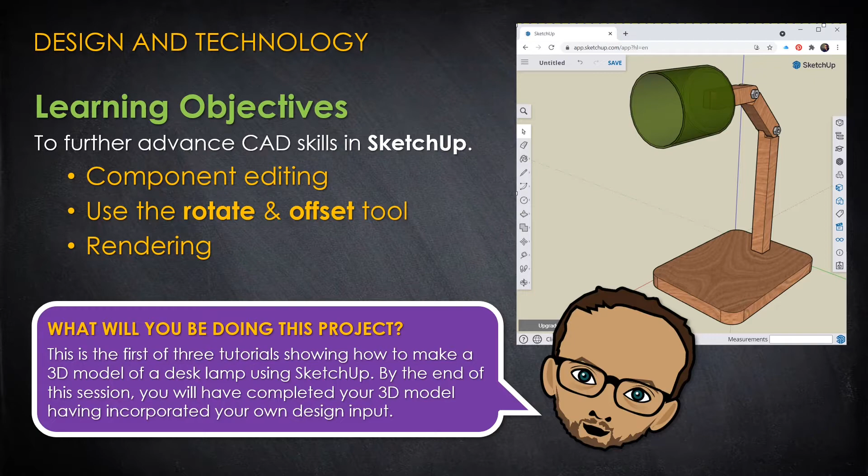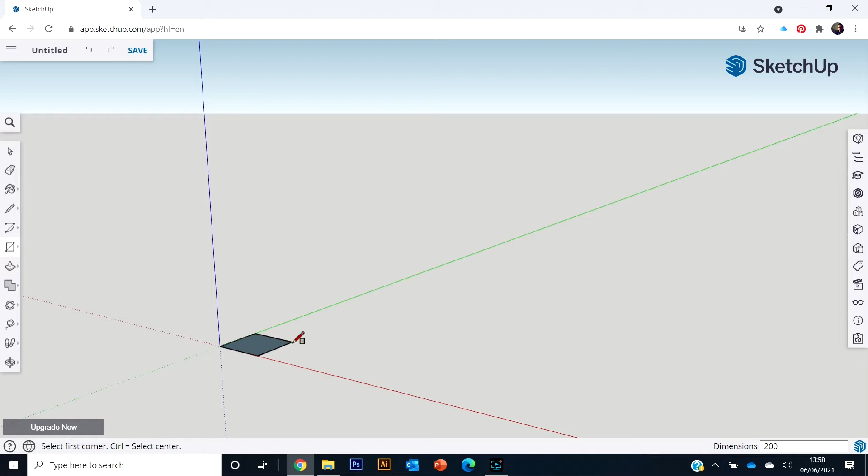Okay, so we're going to start by making the base. We need to get rid of you. I'm going to use the rectangle tool, draw a rectangle. I think the dimensions are 200, 150 and enter, and it's snapped to the right size.

Zoom in and now add some thickness. Use the push-pull tool, click and drag that up, and I think it's about 18mm thick. So 18 and enter. And for now, that's our base, and we're going to leave it like that.

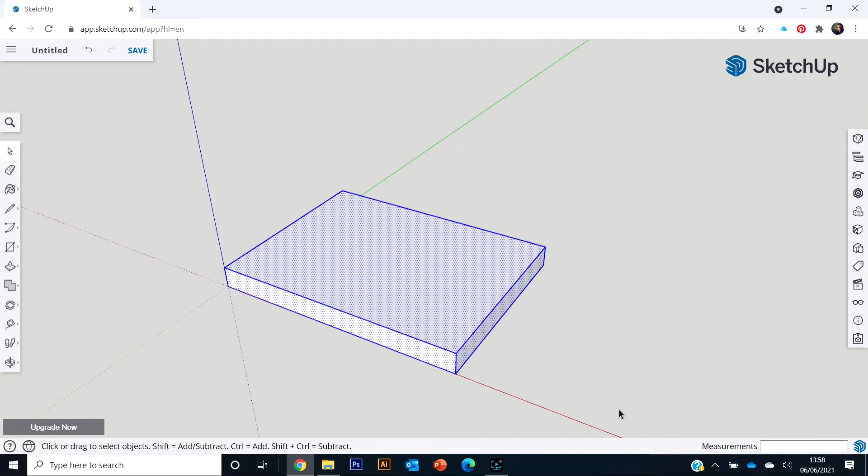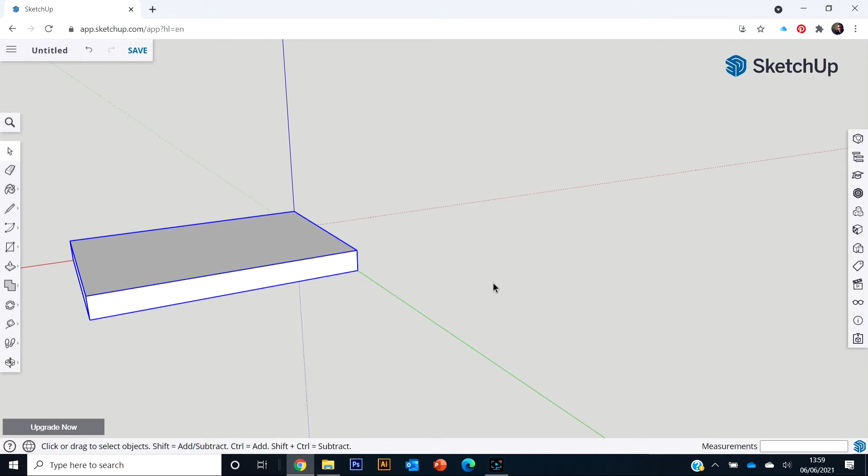So select the whole thing, right click, make component, and I'll call it base. Okay, and we'll come back to that later to make the mortise. For now, what I'm going to do is move that to the side slightly. There we go. So I'm moving it by holding down the scroll wheel in the center of the mouse. I can orbit, and then I can press shift as well to pan and just move it to the side.

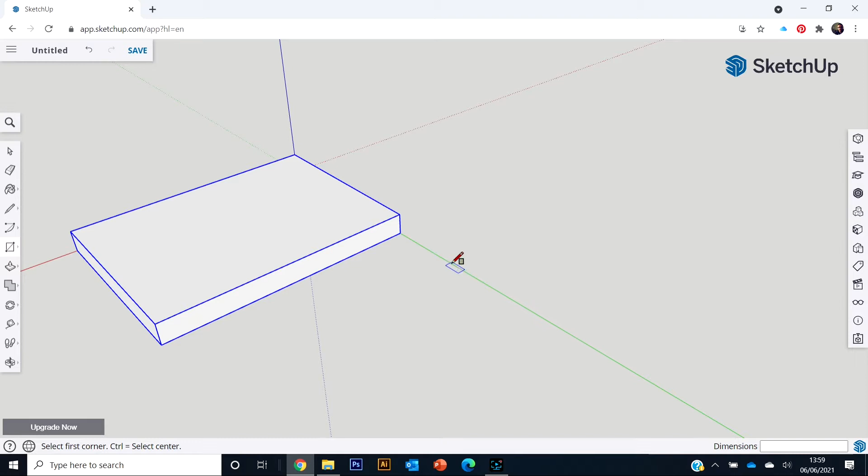So again, rectangle tool, and this is going to be the stem, which is 20 by 20mm, so 20, and enter. That's the width and thickness, and then the length of this is 200. So I'm just going to click, drag that up, type 200, and press enter. There we go. Okay.

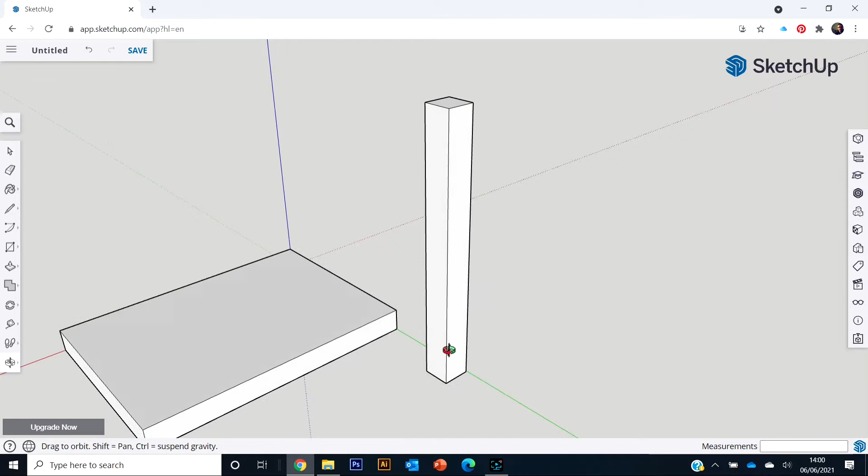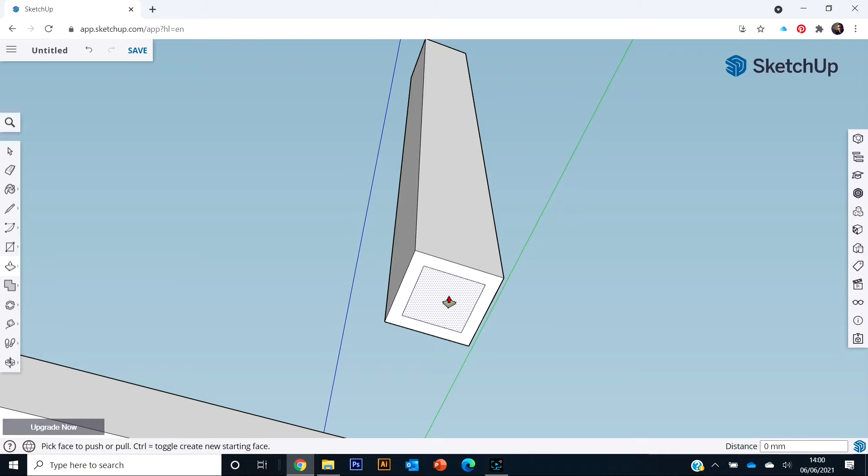First thing I'm going to do is add the tenon. The easiest way to do that is to use the offset tool. So I'm going to go where the push-pull is, use this option, the third one, offset, go to the edge, click, drag in, and I'm just going to drag in by 3mm and enter. Go back to the offset and turn it back to the push-pull, and just drag that down 10. Okay, so that bit's done.

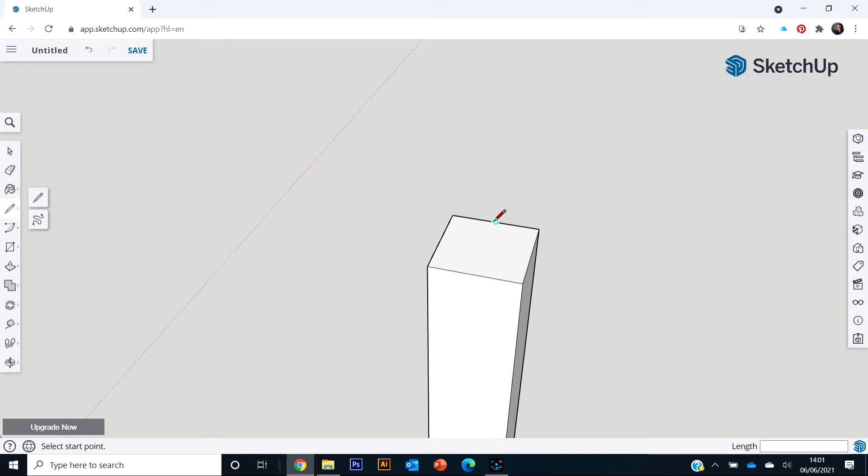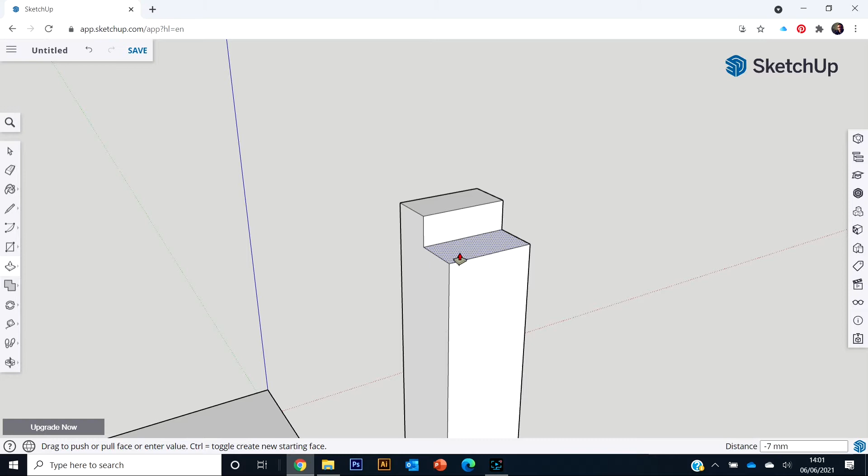Move back to the top, and what I'm going to do is split this in half and take half of it down with the push-pull tool. So pencil tool or the line tool. So I've locked onto that midpoint, dragged it across. Now I can use the push-pull tool and select it, drag it down, and I'm going to make this bit square, so I need to take that down by 20. So 20 and enter. Okay, good.

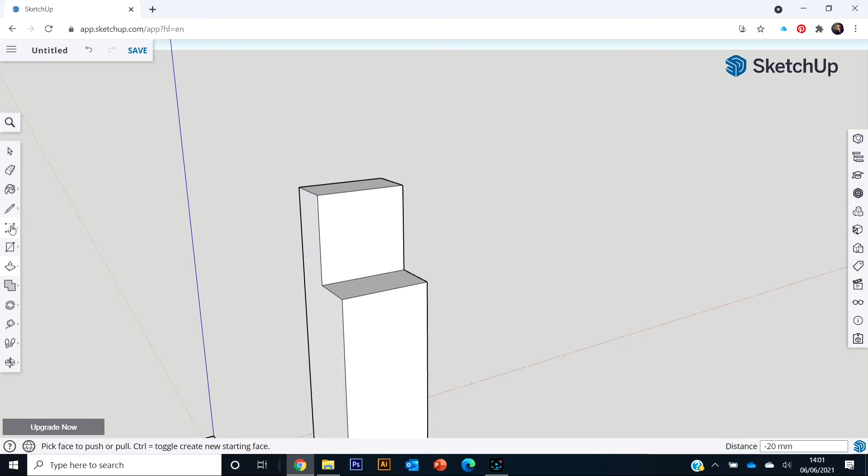Now I want to put a hole in the center, and I also want to round these edges here. So the easiest way to find the center is to draw a line down the middle, get the circle tool and find the center of that, drag it out, and we're using M6 bolts, so they are 6mm in diameter, so I'm just going to make the hole 6mm in diameter. So the radius is 3. Enter.

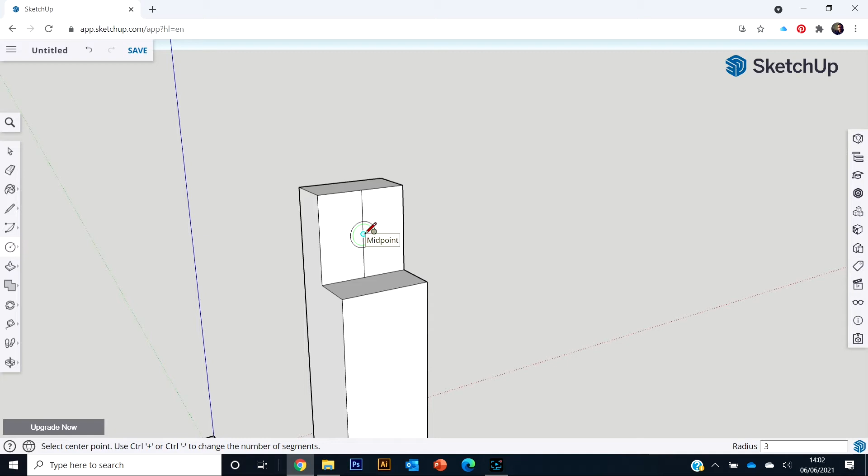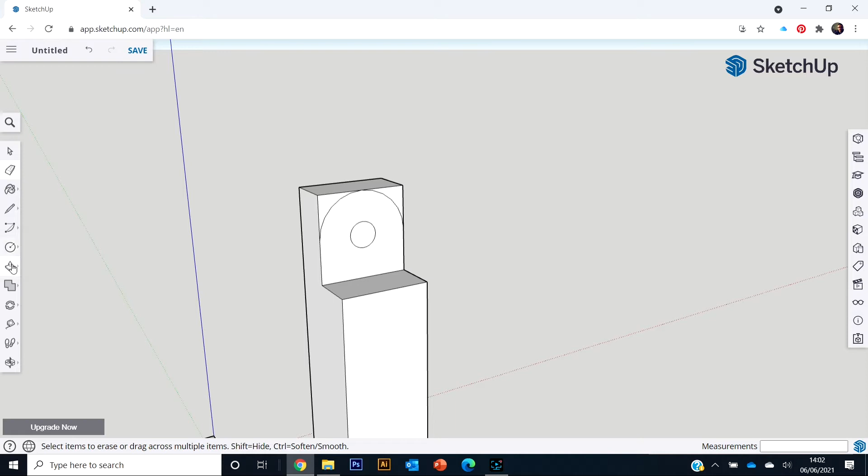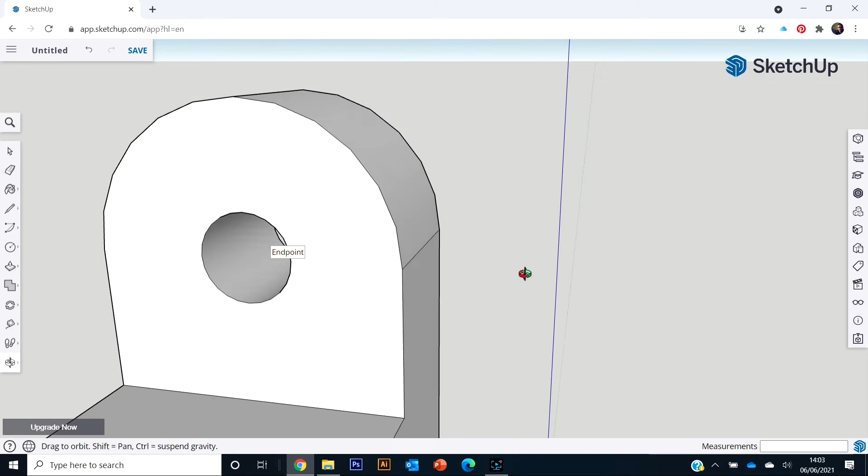Now I won't get rid of the line because I'll use that point to drag that up, and that gives me the curve on the edge. Now I can get rid of that line, and I also want to get rid of that bit and that bit. Push pull tool, make sure that's highlighted, click and drag to the edge, drag to the edge, and do the same here, and I can use the edge there as well. And just a quick check that that's gone all the way through, which it has, and that is done.

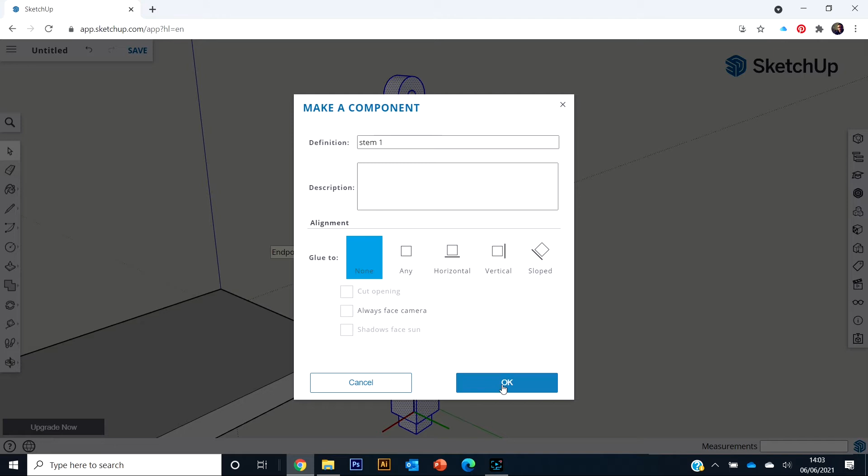So I'm going to make that component now. So selection tool, drag across the whole thing without getting anything else in, right click and make component, stem 1 I'll call it. Okay, so we need another one of those, but the next piece is going to have this on both ends, and it's going to be shorter as well. Is it easier just to copy this one or make a new one from scratch? It's probably easier just to copy this one.

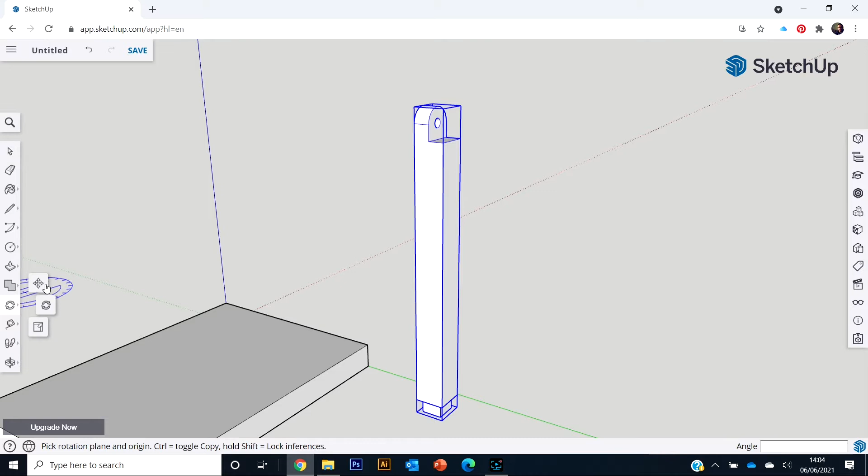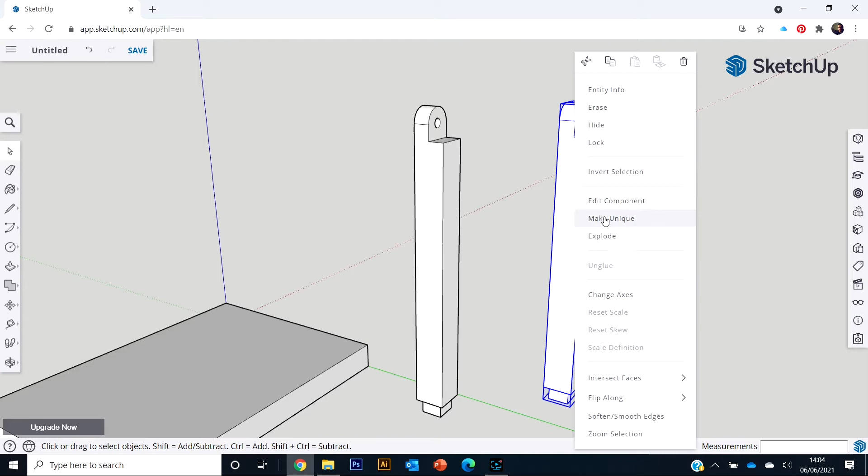Move tool, click, drag it across, and then just tap Control and it'll make a copy. So I've tapped Control and it's made a copy. Alright. Now, because this is a component, whatever I do to this one, it'll do to this one as well. So I need to make it unique. So I'm going to right click, and just under Edit Components it says Make Unique. So it won't do that anymore, they're two separate components now.

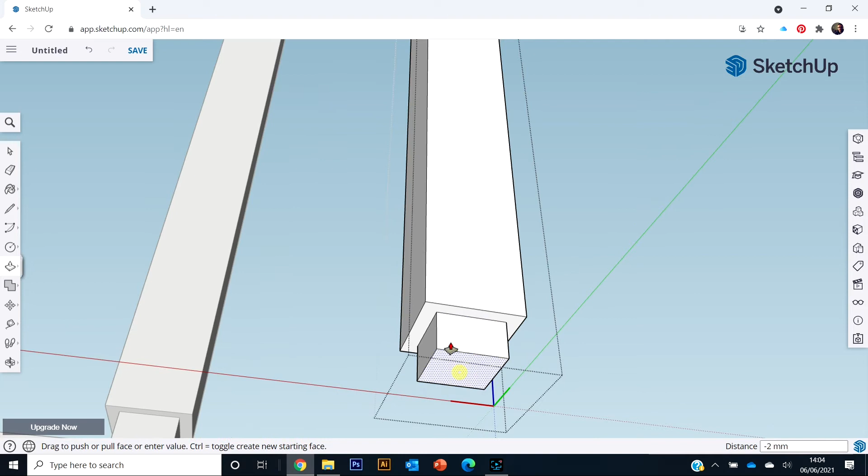And essentially what I'm going to do is edit the component by double clicking. I'm going to get rid of this. I'm going to delete those lines. And I'm just going to drag that up by 100.

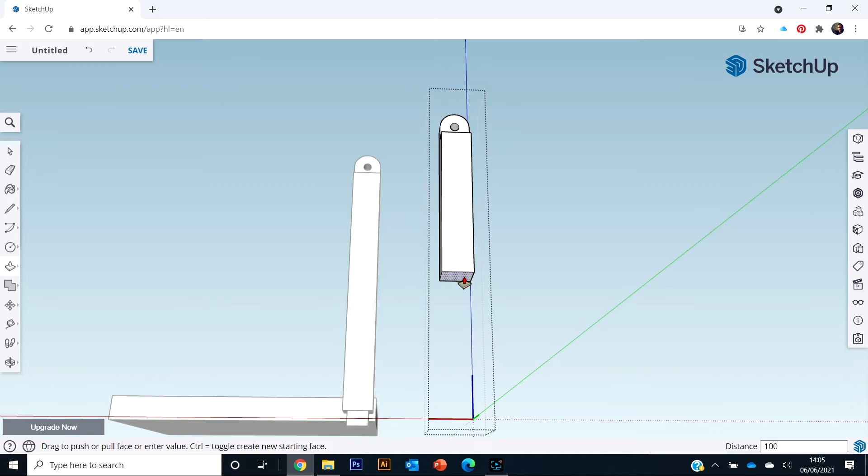And enter. Okay, let's just check the length of that. I can use this pen, the line tool here. So I click on there, that should be 100. And it is, I can see, bottom right-hand corner, I can see it says 100 there.

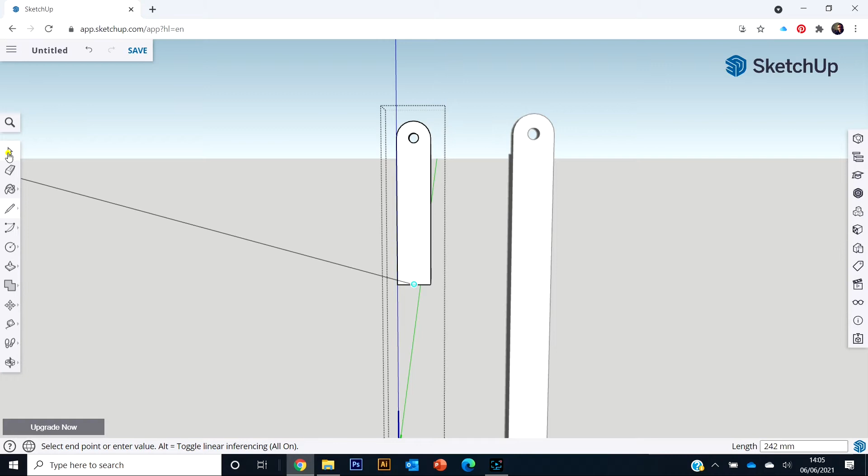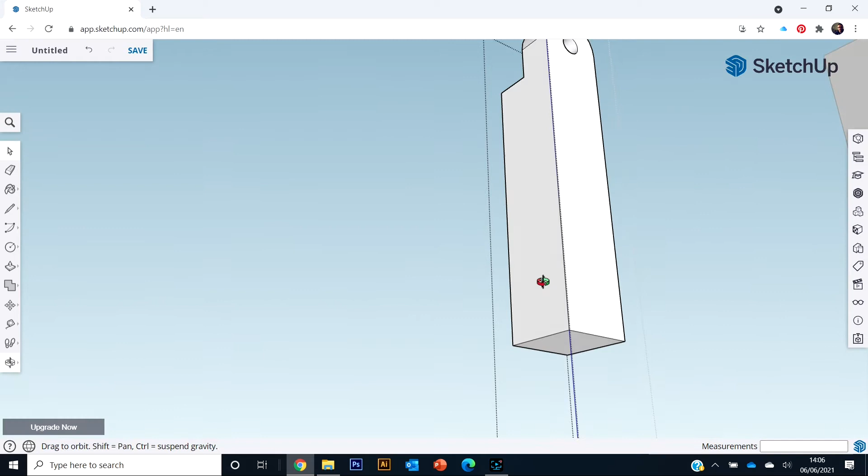And now I need to do this on this end, but on the opposite sort of side. So I'm going to zoom in a bit. Where's the best view? Okay. Line tool. Midpoint. And I'm going to take this bit. Can you remember what that was? It was 20, wasn't it? Okay. Can you remember what we did last time?

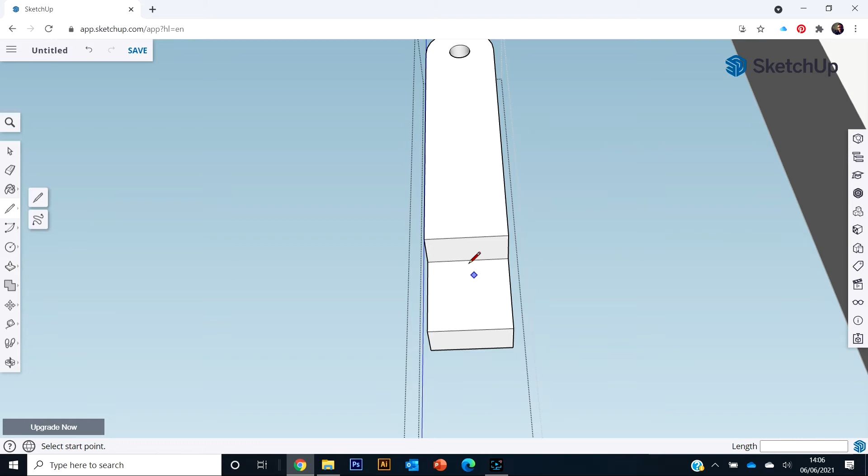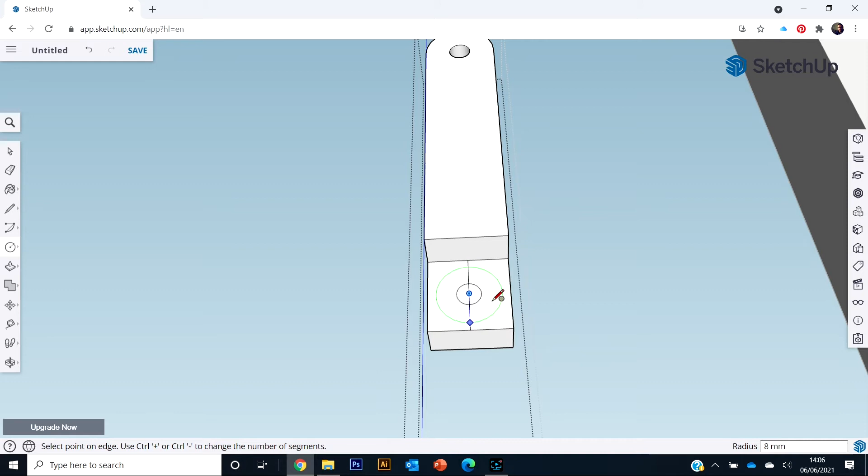Line tool on the center, circle tool, again lock onto that midpoint, drag 3mm because we want a 6mm diameter, and then just drag. Doesn't matter where I drag that to, because they're all the same distance from the center. Delete the line, delete these bits,

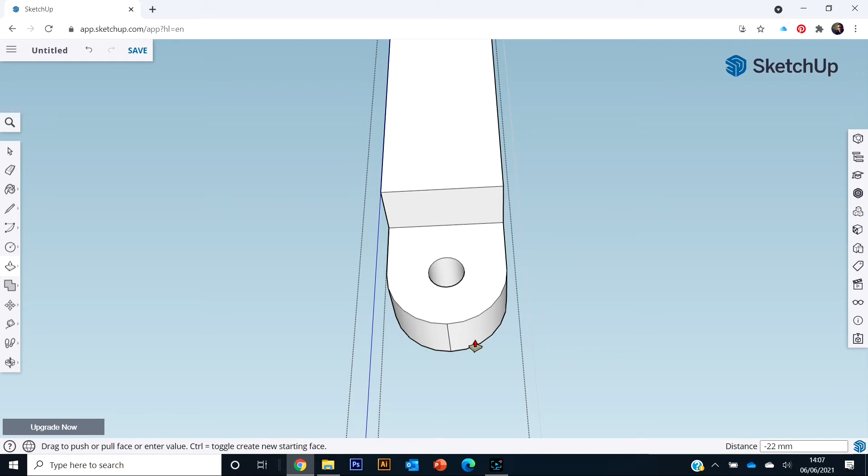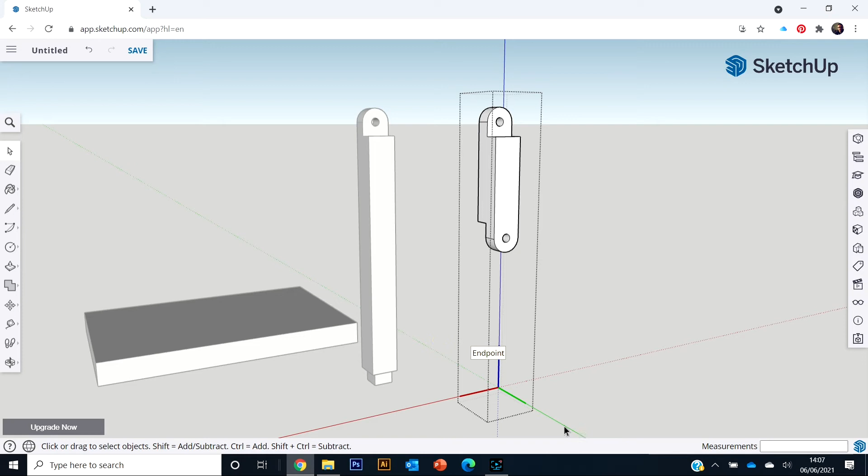and push pull, drag that to the edge, and then the same. I'll just use that edge there to get the right depth of cut. And that's that. That's done, that piece. Is there anything down there? Okay.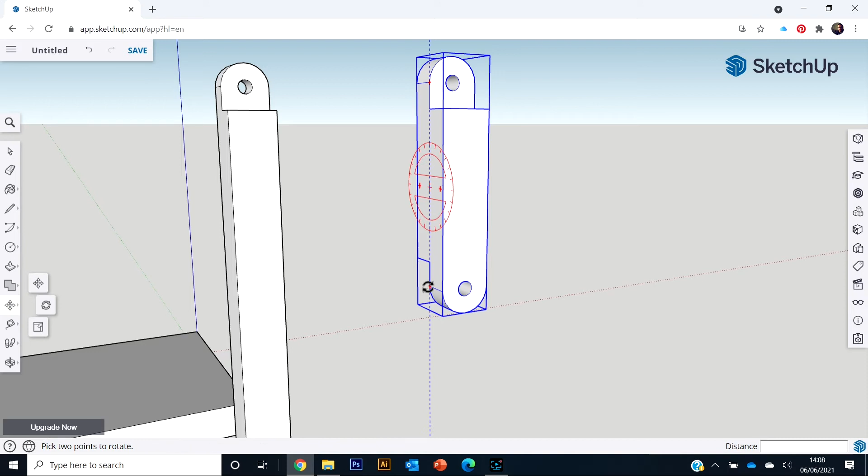Now we need to start putting them together. So we need to think about where the best join point is, and I think it's probably this line here. If I grab onto that edge there and take it over to that one, there we go, that's nicely lined up. And we've got one more piece to do as well. So again, I think I'm gonna take this one.

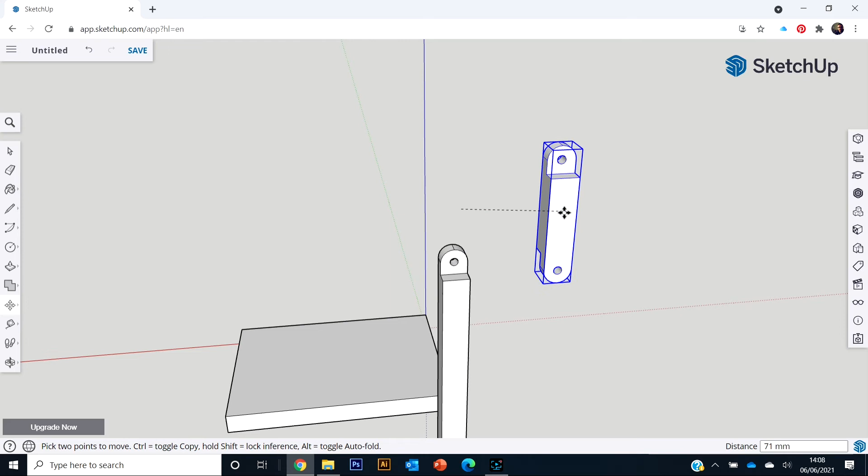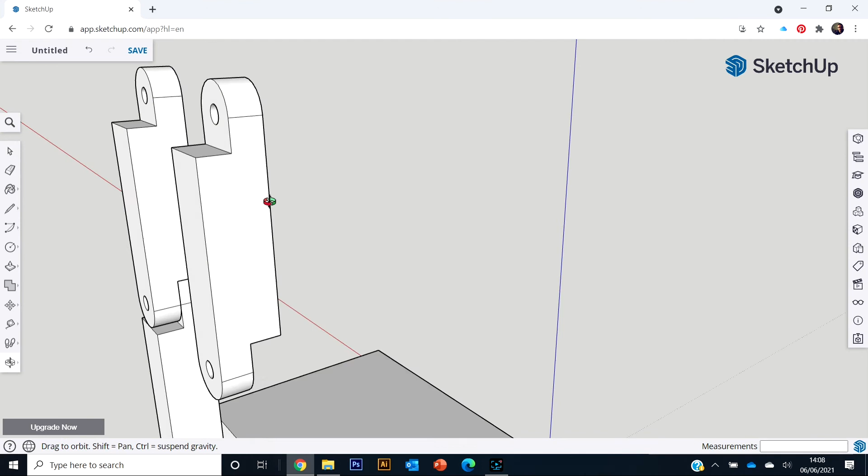How did we make a copy? Can you remember? It was just tap, control. That's it. Right click, make unique. And this time all I'm going to do is get rid of this top. So double click to edit the component, push pull tool, and I'm just going to drag that across like that, really easy, and that's done. That's all we need for now.

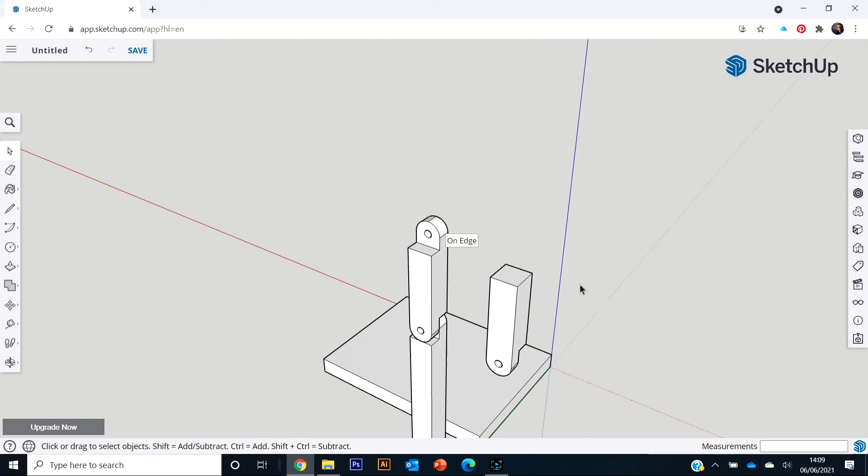Can you remember how we moved it to the right position? Move tool, hover onto that point there and take it over to snap it onto that point there. Okay.

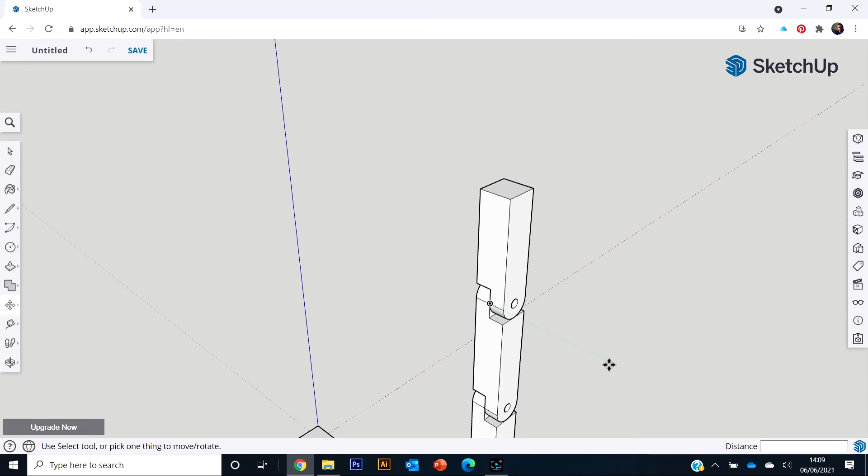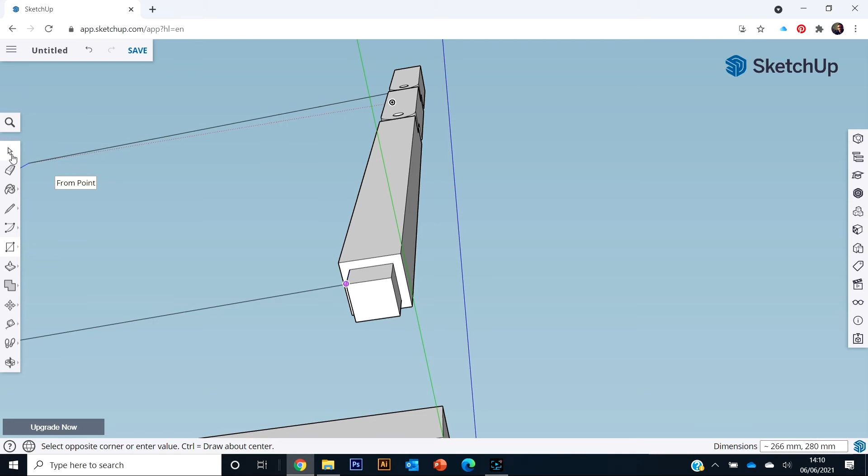Right, we need to go back to the base now and put the mortise in for this tenon to fit. So let's have a look. What dimensions are we working with here? Let's just draw a square. I'll use the square tool and just get that. So that is, can you see, bottom right, that is 14 by 14. So we need to make a hole, a mortise, in the base that is 14 by 14.

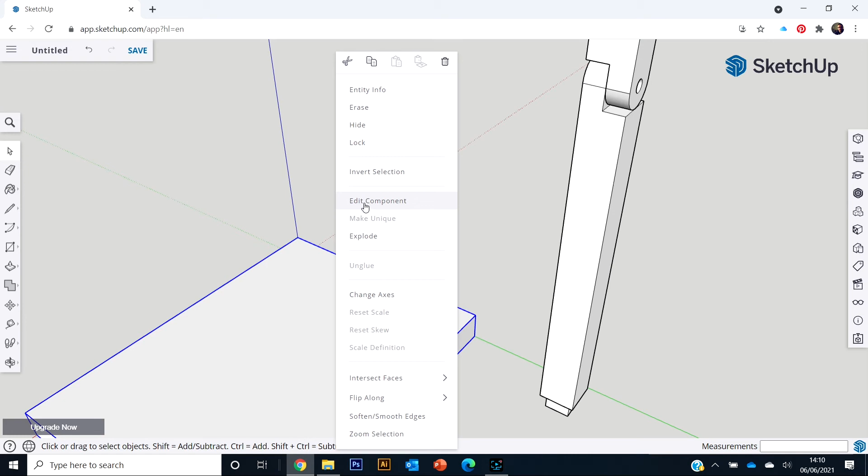Okay, so I'm going to double click on the base. Now you can double click on it to edit the group, or you can just select it, right click and go to edit component. Okay, rectangle tool. I'm going to draw a rectangle that is 150 by 30, just to give me a reference point. That's all it's for. Now that is 14 by 14.

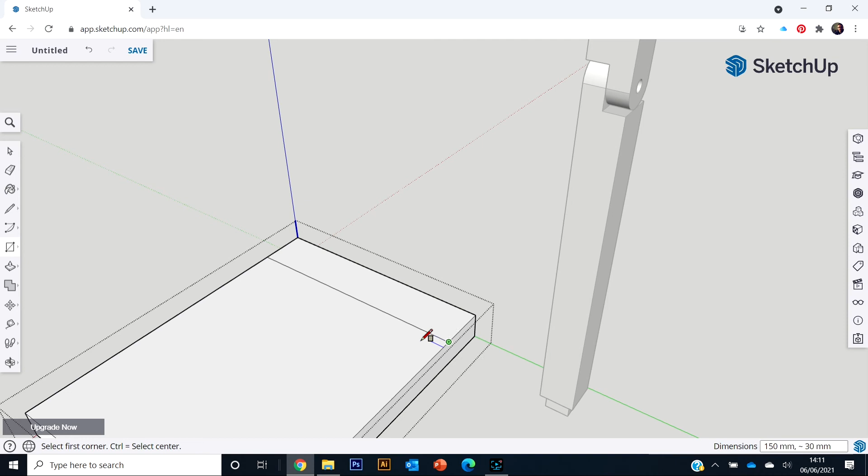So let's see, 150, take away 14, what's that? Oh, 136. Split that in half, we've got 68. So I'm going to draw a rectangle here that is 14. Hopefully this makes sense to you. By 68. There we go. And now if I do my square, that is 14 by 14.

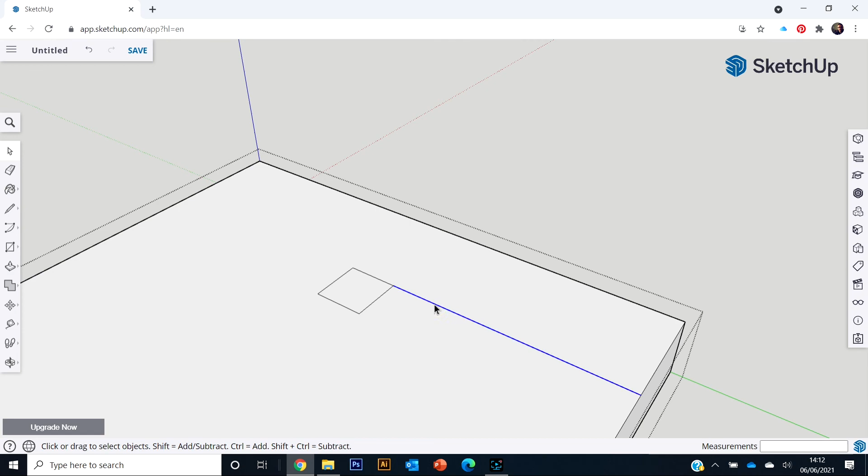14, 14, enter. Now what's this? Is that 68? Yes. Relief. Okay, so that's given us that. All that I've done really is get that into the center by using these reference points and doing a little bit of maths. Well, barely maths. Get rid of these lines. So I'm just selecting them and then pressing delete. Leaves us with this square, and I can just drop that down by about, what was it, 10 mil, and enter. Done. Come out of the component.

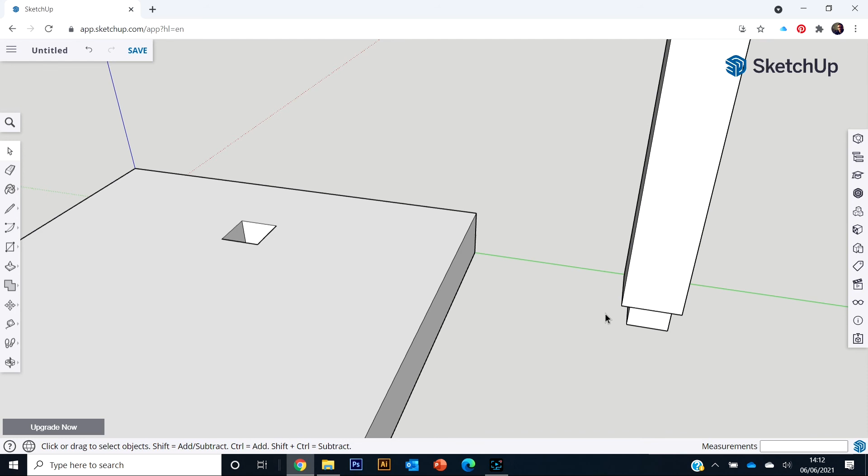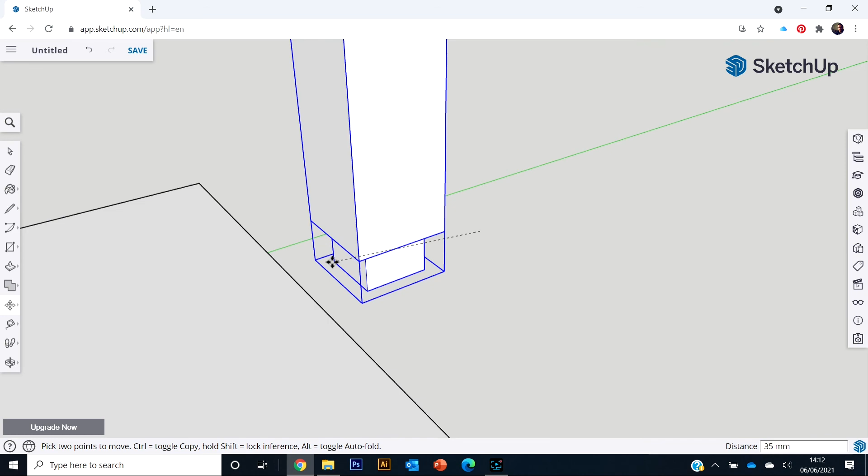Now, how do I get that into the right place? I want to move all of this at the same time, so I need to select it all like this first of all, and then I'm gonna grab this bottom point here, and now luckily in this newer version it goes sort of see-through, so you can find these points that you wouldn't usually be able to see, and I'm just gonna snap it onto that position, and there we go. We have got the base and we've got the stem and the 3 parts.

Okay, so in the next video what we're going to do is add the bolts and the nuts, and we're going to rotate these to get it into the right position, and we'll put the lampshade on as well. Oh, and we need to add our own design to the base, but like I said, we'll do that in the next video.